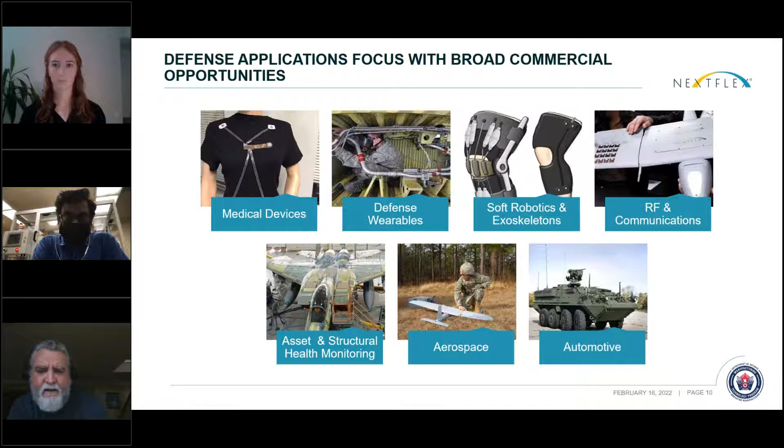Ed? Yes. I'm sorry to interrupt you. This is Scott. GoToWebinar is telling me that the attendees are still on hold. Oh. Is Laura on the meeting? Yes, she is. I sure am. Let's see.

It seems to be okay on my side, and we're being recorded. So let's see. Bruce is raising his hand. Oh, okay. All right, we're getting some comments. So I apologize. It must be my system that's wrong, but I didn't want our attendees to just be waiting for us. Sorry. Okay. Thank you, Scott. That's nice to know. Yeah, I think we're good.

Thank you. So early within NextFlex history, we wanted to come up with a project where we could not only demonstrate the attributes of flexible hybrid electronics, but also show the capability and maybe open up the vision of other people as to what they could do with this sort of technology. And so we took a well-known microcontroller, the Arduino Mini, and we did a direct conversion to a flexible hybrid device.

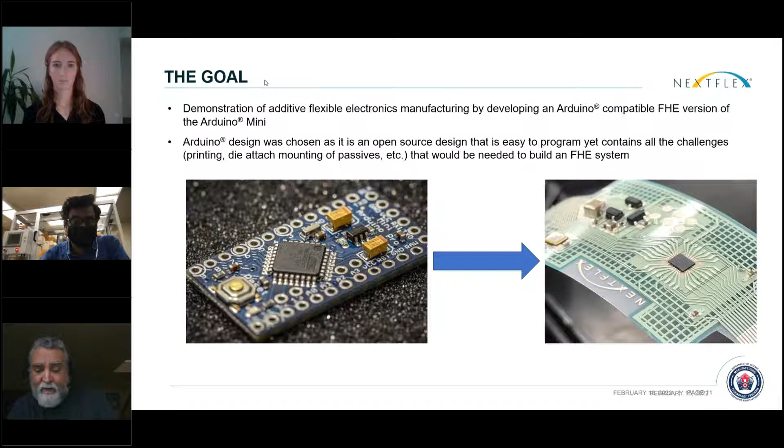Next slide. Oh, yeah, thanks. And so this led to an evolution of this platform, upon which we built up different projects, some for DoD and some for commercial applications. And basically, we took the basic microcontroller platform, bumped up the capability quite a bit with a different microcontroller. We demonstrated low power Bluetooth connectivity.

We printed antennas and basically expanded the applications per purpose, adding sensors in some cases and physiological sensors in other cases, and in other cases adding structural health sensors. Again, taking this basic concept of a flexible microcontroller and expanding the applications. Next slide, please.

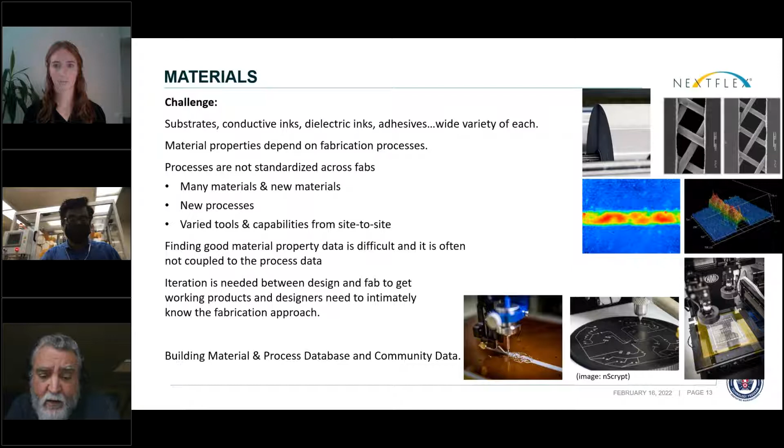We also do more than just build devices and prove out concepts. We also evaluate materials, processes, and equipment with the end goal of characterizing each and finding the optimal application where that particular process or that particular piece of equipment is most relevant. Next slide, please.

Within our technology hub, we have possibly the largest variety of state-of-the-art deposition systems or printing systems, such as screen printing, which is the workhorse of our technology hub, and gravure offset. And by the way, many of these are printing techniques that have been common to the printing world, the newsprint world, for quite some time. But the application of these into printed electronics is somewhat new.

We also have digital platforms such as extrusion and aerosol print capability. And a little bit more later on today, we'll be talking a little bit about plasma jet deposition with Space Foundry. Next slide, please.

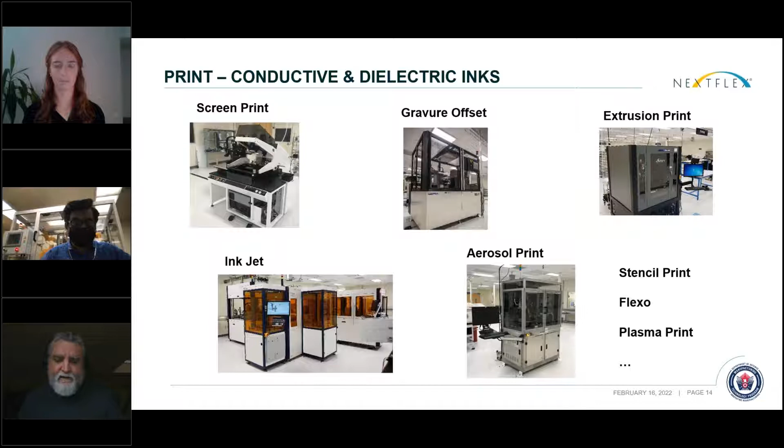Also within our facility, we have a manufacturing integration area, and the workhorse in that particular facility is our BESI, where we do ultra thin die integration. That is to say, we'll take an unpackaged chip and we'll thin that chip down to the point where it also is flexible, and place that directly on the substrate, and the piece of equipment that we use to do that is basically the BESI.

In the future, we'll be bringing up another platform which will also be capable of putting down the die and processing with an alternative methodology. And that's with our universal and adapting of the universal pick and place tool.

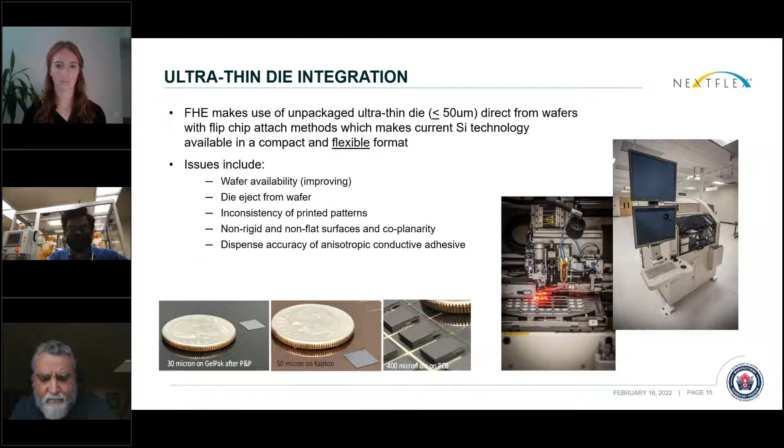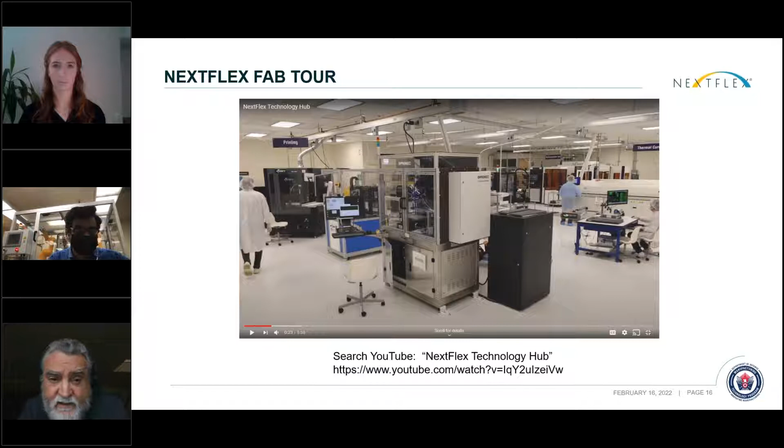Next slide. So if you'd like to have a virtual tour of our technology hub, you can go to YouTube and try searching NextFlex Technology Hub, and you should have a couple hits where you'll get to do a relatively current walkthrough of our technology hub and see some of the many pieces of equipment that we have there. Next slide, please.

So now I'd like to take a little bit of time to talk about the Defense Manufacturing Community Support Program grant through the California Governor's Office. Next slide, please. The Defense Manufacturing Communities Support Program is designed to support long-term community investments that strengthen national security innovation and expand the capabilities of the defense industrial ecosystem.

And under this program, the Department of Defense awarded 6 grants totaling $25 million under the Defense Manufacturing Community Support Program by the Office of Local Defense Community Cooperation. These awards follow a competitive selection process culminating under the Undersecretary of Defense for Acquisition and Sustainment.

And under this process, the state of California, and specifically the organization within the state of California, Cadence, which stands for the California Advanced Defense Ecosystems and National Consortium Effort, was first designated as a defense manufacturing community, and then later awarded a grant of $4.9 million that was given to the state of California to provide this support. Next slide, please.

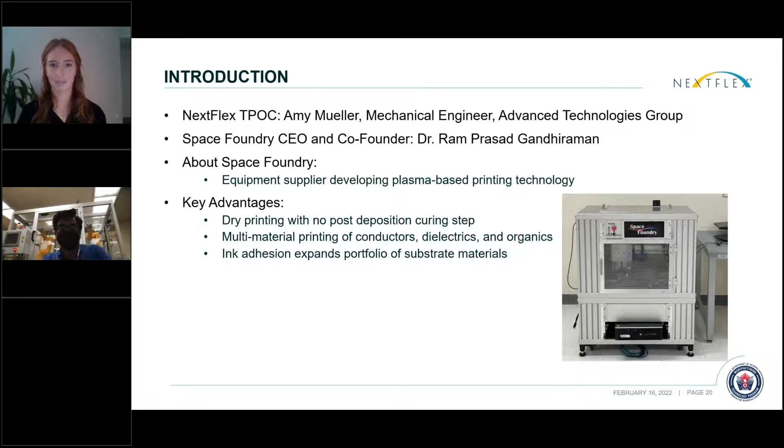Apologies for the fire alarms. Let me give it 1 second.

All right. So by integrating Space Foundry's OEM module on our 6-axis robotic arm, we are able to together confirm that the print process does not rely on gravity. This feature, plus the ability to cure as you print, makes Space Foundry's technology a huge enabler of large non-planar print applications. Next slide, please.

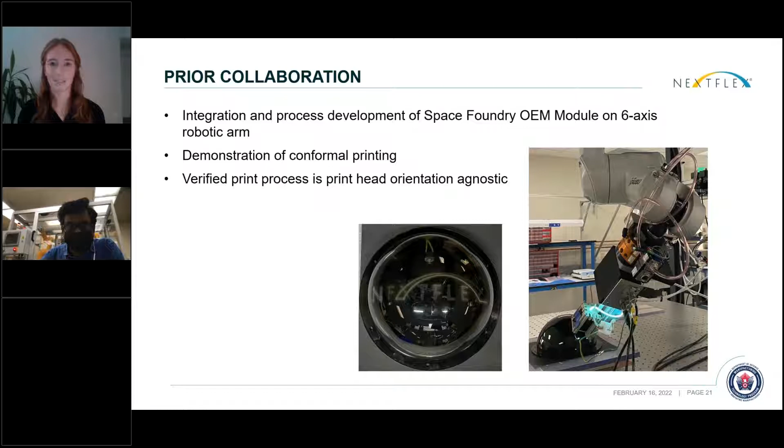As part of the Cadence program, we at NextFlex were able to support Space Foundry through these 2 main tasks. So NextFlex supported the continued technology development by providing working space and resources at our technology hub in San Jose. This regular access to our facility included working alongside NextFlex staff and the ability to use test and characterization equipment found in our fab and test lab.

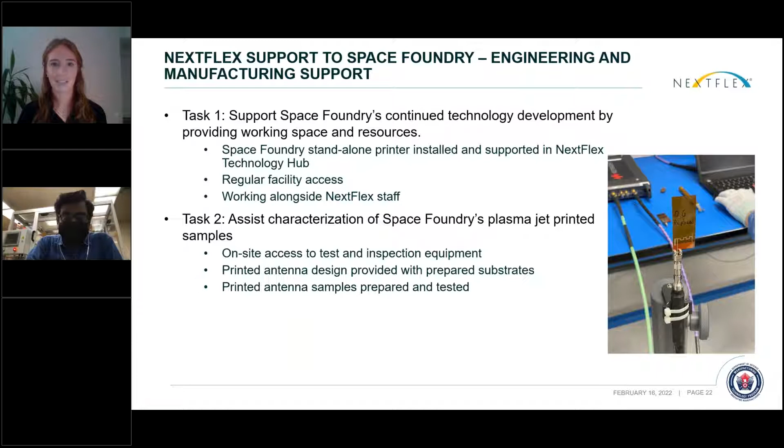We are also able to support the characterization of plasma jet printed samples by providing the design and characterization of printed antenna samples. And with that, I'm going to hand this over to Ram to talk more about Space Foundry and how the Cadence program has supported their efforts.

Yeah, thanks, Amy and Ed, for the introduction and also for the opportunity to talk to the wider audience. So Space Foundry is a hardware startup here in Silicon Valley. We are a spin-off of NASA Ames Research Center. I used to work on site as a contractor at Ames, and then spun off Space Foundry, licensed my own patents, and myself and my co-founder Dennis from Stanford, we both started this

company. So we are currently selling equipment and are developing some very interesting solutions for printing a wide range of materials. We have a few patents that are granted and several filed, and we are primarily funded by NASA SBIR. We have an ongoing active phase 3 SBIR. NASA has invested over $1.6 million so far in Space Foundry. And we work very closely with the groups from Marshall Space Flight Center and also Ames Research Center here in California. And we are primarily revenue generating through equipment sales.

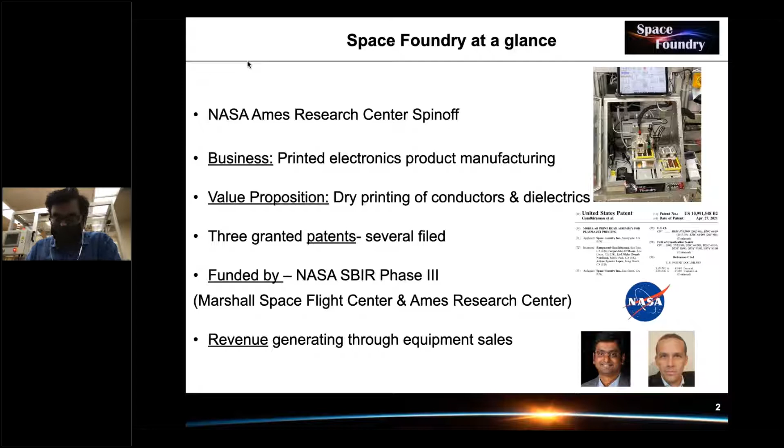So we are actually focusing on the emerging printed electronics market. So we are not trying to displace something that is already well established and working. What we are trying to do with our technology is to enable new applications and enable printing on certain platforms which are very difficult for the traditional way of printing.

For example, we are working with an aerospace and defense company jointly through NextFlex, where they are working on printing on large aerospace structures. We print certain metal patterns onto these structures, and PlasmaJet has the ability to print on such large 3-dimensional objects fairly easily.

And we are also in discussion with certain companies here in Silicon Valley to enable conformal electronics on their AR/VR headsets, and also to enable some semiconductor packaging applications. And of course, in-space manufacturing is our core vision. So I'll go through some of these applications.

So printed electronics is an emerging industry, and there are certain issues associated with this industry. Some of them include ink, because there are really good printers out there, but they rely heavily on the ink supply chain. The inks need to be cured, and the metals generally oxidize in air, so the electronic properties deteriorate over time. So it gets very difficult processing the ink. And then multiple equipment sets are needed when printing certain materials.

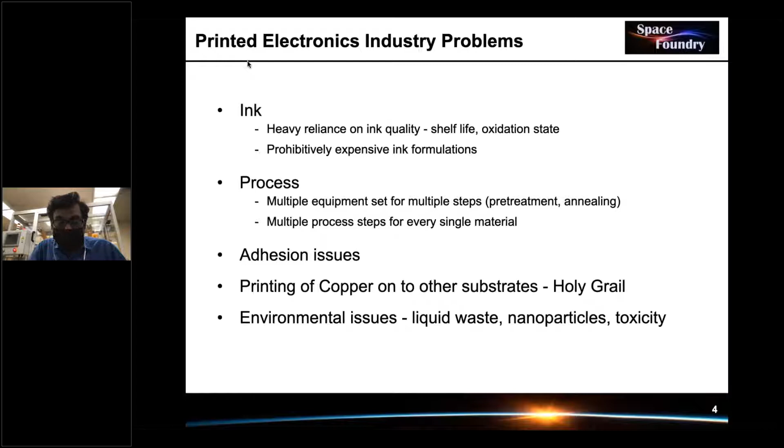And since we are printing on platforms that are generally not amenable to printing, like the aerospace structure I mentioned, adhesion is a major issue. And printing of copper is one of the holy grails. So we're focusing on solving some of these issues. And not to mention, there is no liquid waste associated with this kind of materials processing, no nanoparticles, no toxic byproducts. So it's a fairly environmentally clean process.

So what we're working on is called plasma jet printing. Plasma is the bread and butter of the semiconductor industry, used for making chips, but they use very bulky equipment, mostly vacuum-based processing. What we have developed is like a pen, where the pen can write conducting lines. You can basically write a circuit using this plasma pen.

The advantages include that it's dry printing, so you don't have to cure. So you are reducing some of the risks of oxidation, and it reduces the number of processing steps and also the materials cost. And as I mentioned, we use off-the-shelf inks. We are more or less agnostic to the type of ink, so we can handle a wide range of inks. At the same time, we have an in-house water-based ink that reduces the supply chain issues significantly. These inks have a longer shelf life, and since there are no nanoparticles, this becomes ideal for in-space manufacturing as well.

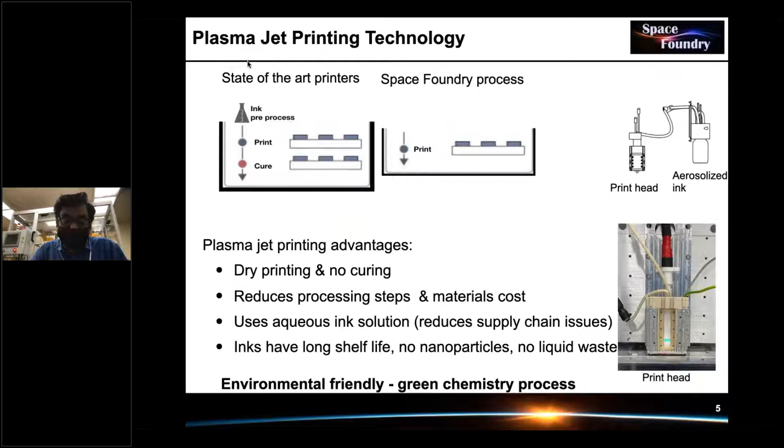So basically, plasma here is different from blood plasma. This is a gaseous plasma. It's like a lightning discharge, happening in a very controlled environment, a low temperature process within the print head. You introduce a gas, apply a high voltage, the gas becomes conducting, and because of the electromagnetic field, all the particles in the printhead get accelerated. So they bombard the substrate, and as a result, the adhesion is better. And you can tune the electronic structure of these materials. These are fairly known in the semiconductor industry, and we are adopting that process to this emerging printed electronics market.

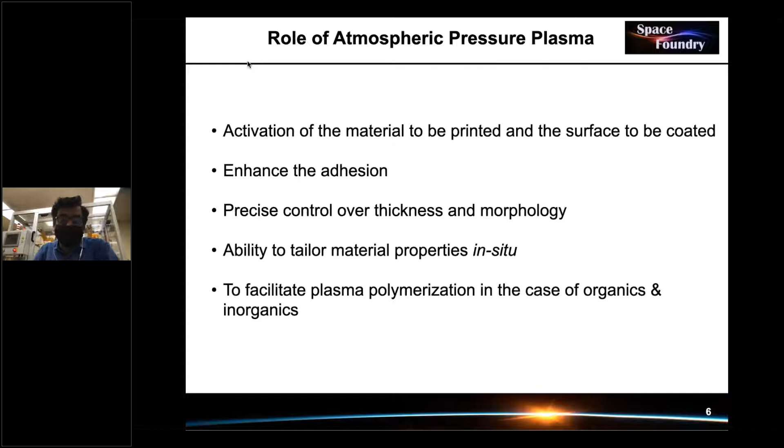So we have been selling equipment so far to universities and federal labs, and we are currently in discussion with some companies to see if we can do a printing service, where we can scale the business in certain segments apart from selling equipment.

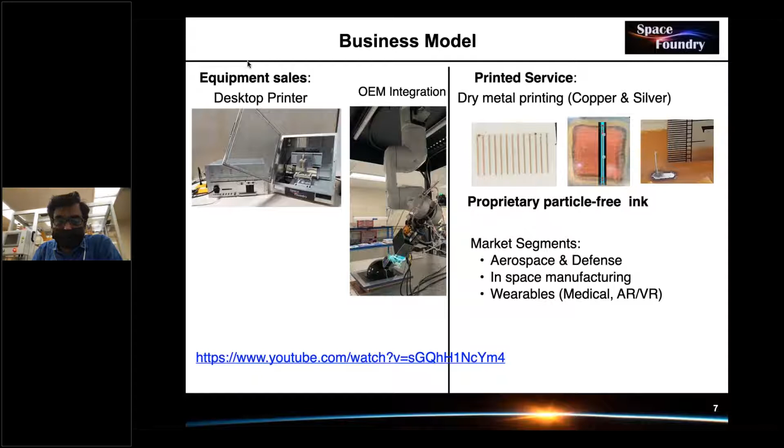Some of the verticals we are working on currently: the current focus in aerospace and defense is on conformal antenna printing, what you call frequency selective surfaces as well. The other application, as I mentioned, is AR/VR conformal antennas, and then early stage discussions with the semiconductor and auto industries. What we have demonstrated is that plasma jet printing is going to be the only viable solution to enable embedded electronics on really large three-dimensional structures, which are very difficult to process using conventional materials processing technologies.

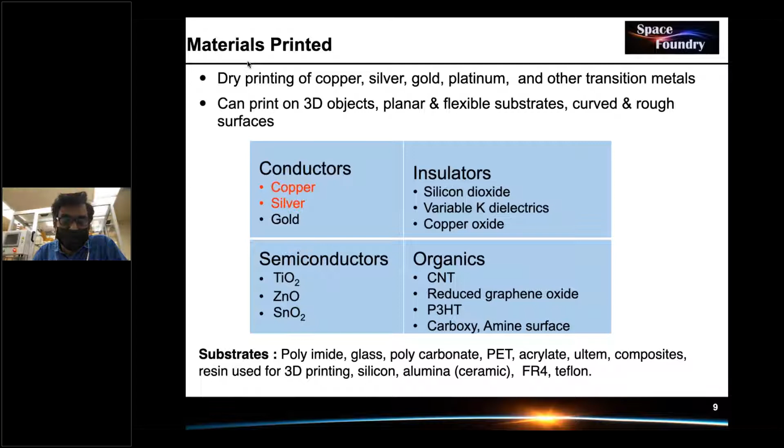So we have demonstrated a wide range of printing since my days at NASA Ames, over the past 10 years exactly now. But as a company, we are focusing on copper and silver. This is a true enabler, a platform that can print a wide range of materials. But since we are a small company, we need to focus on a particular thing. So we decided to focus on conductors, primarily copper and silver.

Some of the examples of copper and silver prints that we have been printing using both proprietary ink as well as off-the-shelf inks. We have been printing antennas, and NextFlex has been helping us in characterizing this.

I will go through that. Wi-Fi antenna and X-band antenna on polyimide, and we have also been printing some vertical patterns. These are very early stage data that we have. So we are in discussion with the semiconductor industry to see if we can use this for filling the vias for their IC manufacturing, for their chip manufacturing process.

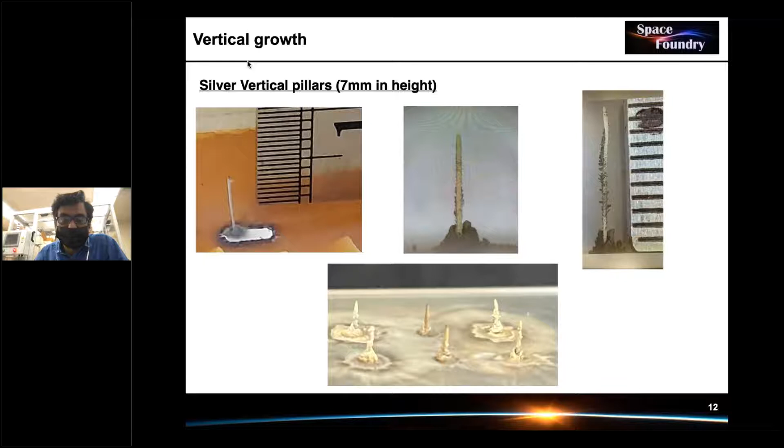So moving on to space, basically the technology was originally developed, as I said, at NASA Ames, meant for space applications, and we have been selling equipment as revenue generating to somehow mature the product as we are working through NASA grants. So we have gotten to a stage where the product is mature, and we recently demonstrated printing in zero gravity.

I'll show that in the next slide. Space Foundry's vision is to become an indispensable supply chain for any metallization need in space and on the Moon. We have certain applications that we can really enable, like phased array antenna metallization and interconnects for solar panel manufacturing and alloys as well. We have the capability to print two different materials, mix them, create alloys and also metamaterials.

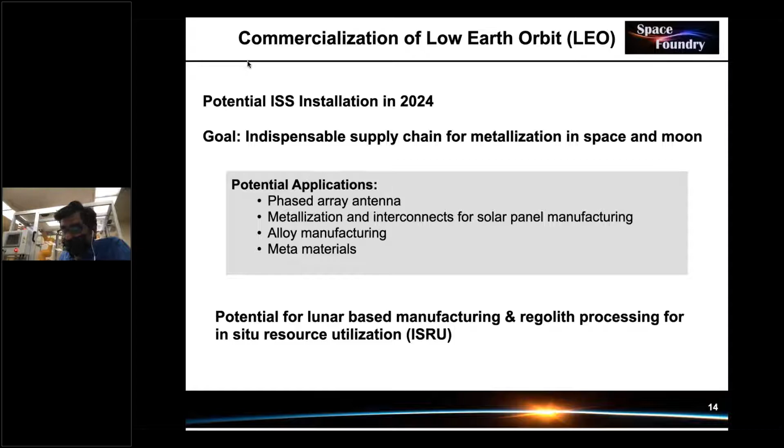So we will be working with some of our partners here, also with NextFlex potentially on lunar-based manufacturing as well. So our recent demo is actually very interesting. I'm not sure if most of you are familiar with what is called microgravity printing, zero gravity flight.

Basically, this is to demonstrate that the technology works in zero gravity. There's a flight operated by a company called Zero Gravity Corporation. They basically run summer and winter campaigns to run experiments, primarily for NASA funded projects, or those companies that are interested in space applications. If they want to demonstrate that their technology works in microgravity, one of the easiest ways is to take the product on this flight and demonstrate that it works during the microgravity conditions.

So the way it works is the flight takes a parabolic path. It climbs up and then changes direction. While climbing up and then climbing down, the G value goes all the way up to 1.8 G. And then when it changes direction, there is a free fall for about 20 to 25 seconds. That's when you get to float. So we have to print in that window.

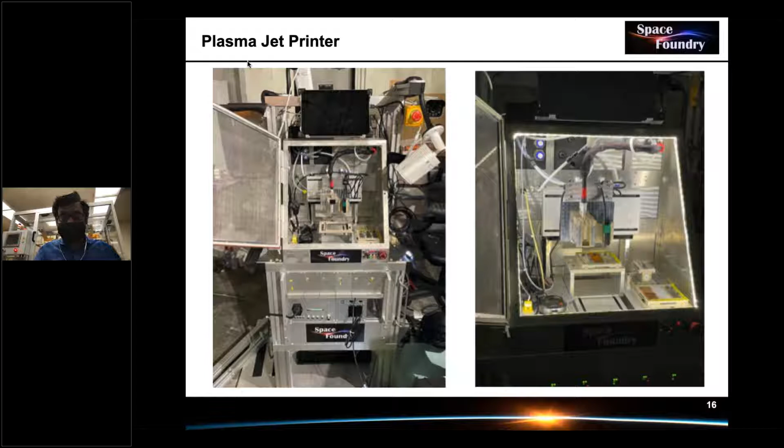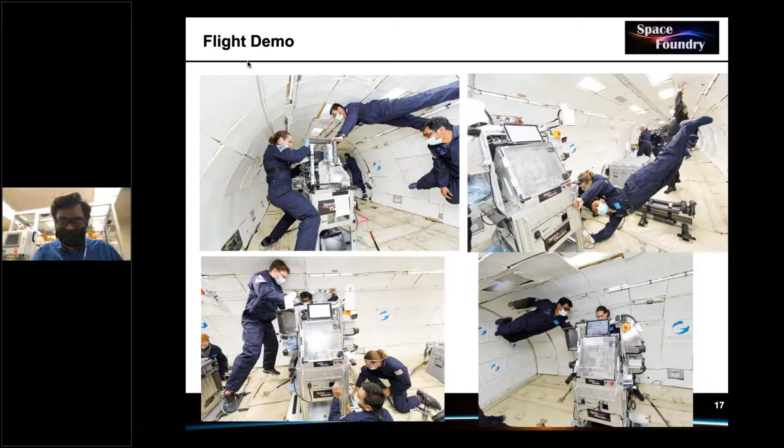So we have done that. We took this printer into the flight. We programmed it and then demonstrated printing in this flight. So here are some of the pictures showing us working in this microgravity environment.

It was actually, we had a very challenging time. We had 4 flights that were reserved. We had intense plans for every day. And on the very first day we go up, and then we lost communication. Basically, the printer was not working. It was extremely stressful.

Because the flight goes from 1G to 2G and 0G, some of the solderings get loose, and the electronics, the wiring that is sagging, that's going to pull, and it will lose the connections. So we kind of understood that and then tried to fix it. And then we also realized that 25 seconds is way too low, especially if you are changing from 1G to 2G, you get pulled, and then suddenly you get released, and then you float, and then again you get pulled to the ground. So it gets, the brain doesn't work, especially for the first 2 times you are there.

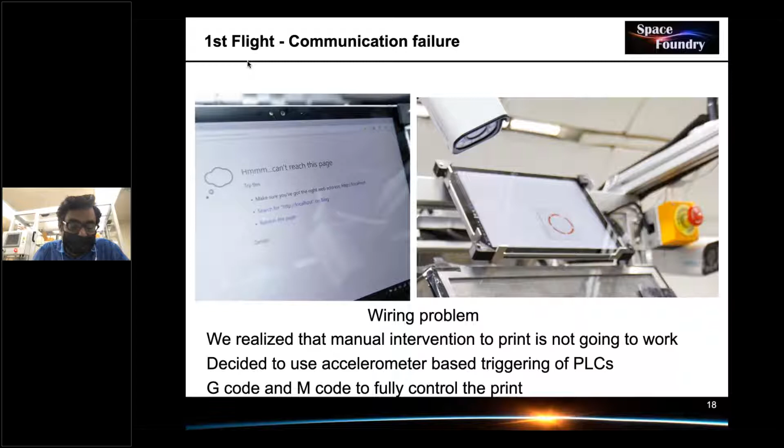So we decided to go completely automated. This is a system that has a lot of wiring that absolutely needed fixing.

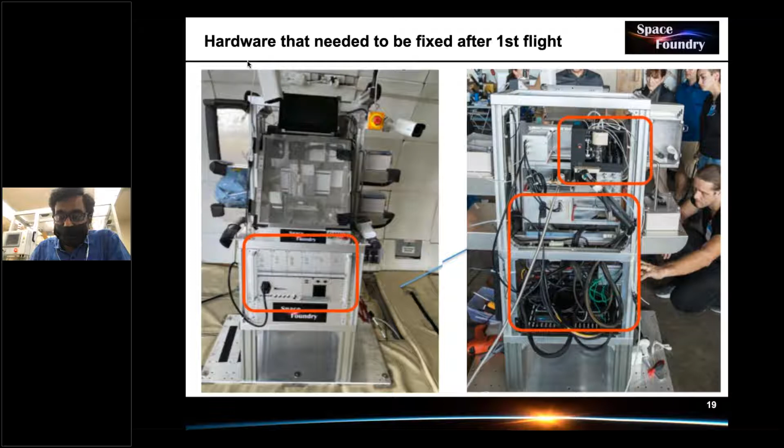And then we addressed that, Marshall and Ames folks helped us, and then we actually visited Kennedy Space Center. There the payload people also worked with us, and we solved that issue, and then we were good to go. We tested on the second flight, and then there was another problem we came across because of some pressure related issues. Even the second flight didn't work, and then on the third day we were getting some partial success.

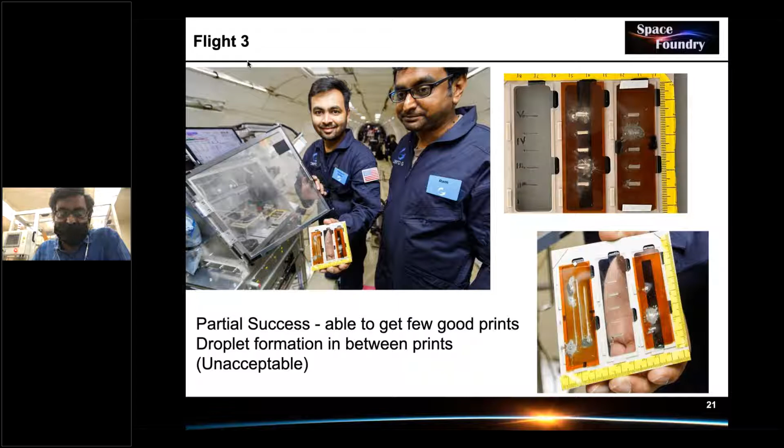So we decided to focus on that. We had very few hours to fix it before we left the aircraft, and then came back the next morning. We fixed it, and on the final day we were able to get really good prints - absolutely good, very successful. Some of the properties are actually way better than what we see on the ground. NASA has funded us a continued flight demo, so we'll be doing more studies in June this year to substantiate our claims and demonstrate further.

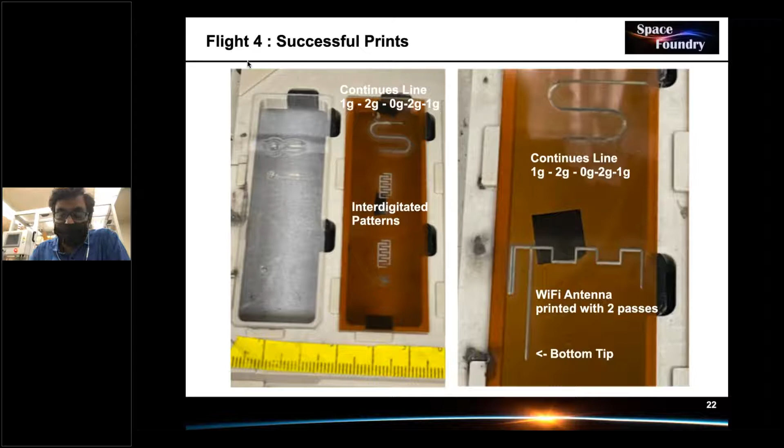These prints are all in 0G, close to 0G. We will also be demonstrating in lunar gravity, because we are submitting a proposal for lunar-based manufacturing.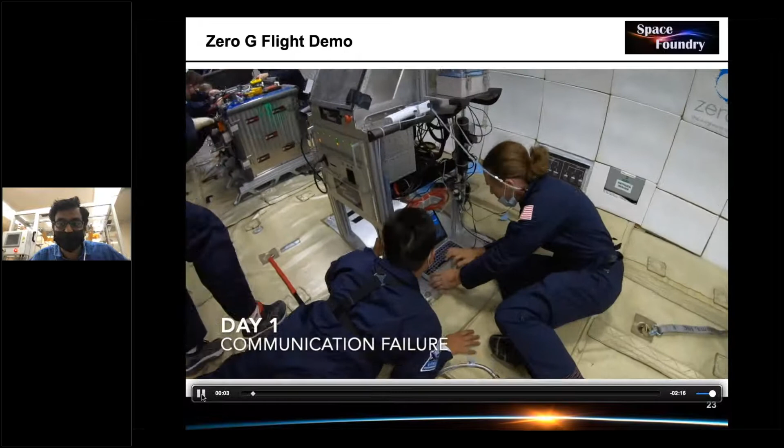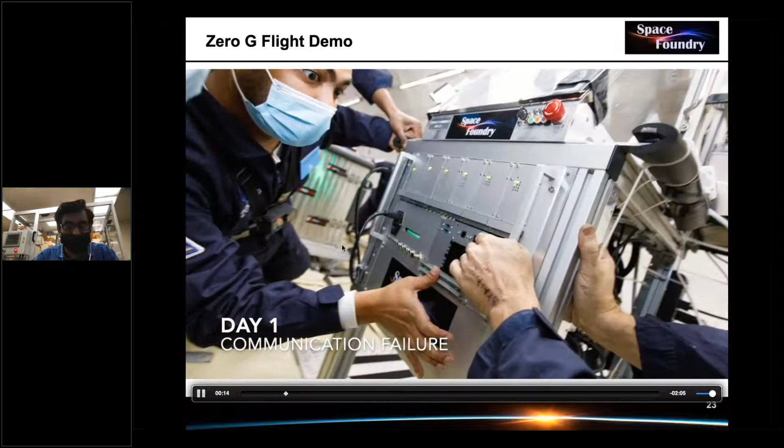So that's day 1. Sorry, I don't know what happened there.

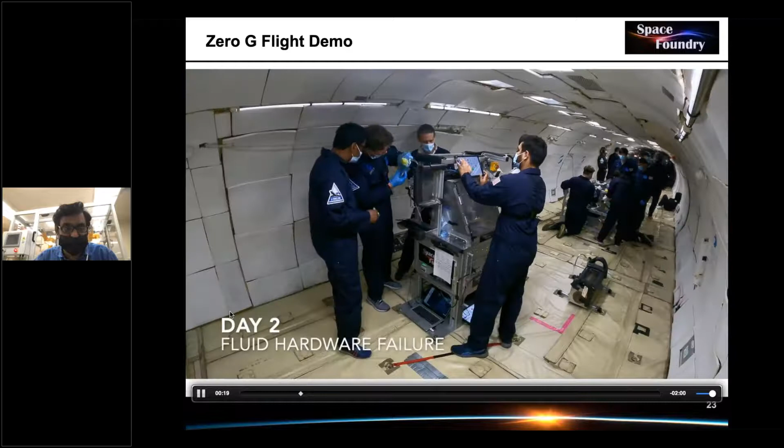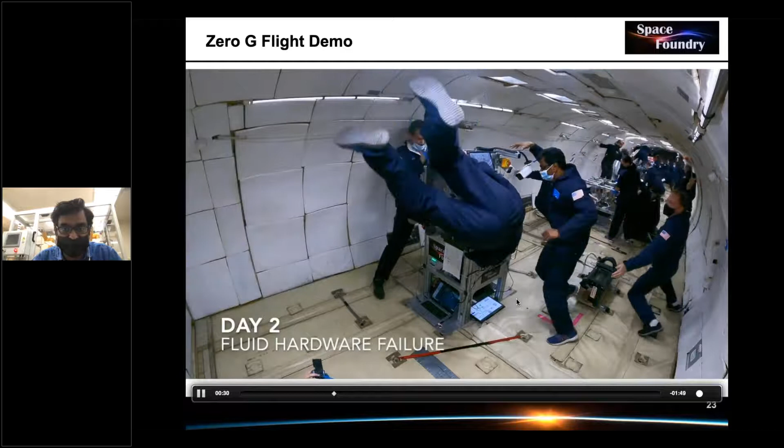On day 2 we had fluid delivery issues, and there were no prints. We were disappointed. Then on day 3 you see that one of our colleagues, Daniel, started puking.

This flight is well known for that, it's also called the vomit flight. Because of this varying gravity, you tend to vomit, especially since it's kind of stressful at times.

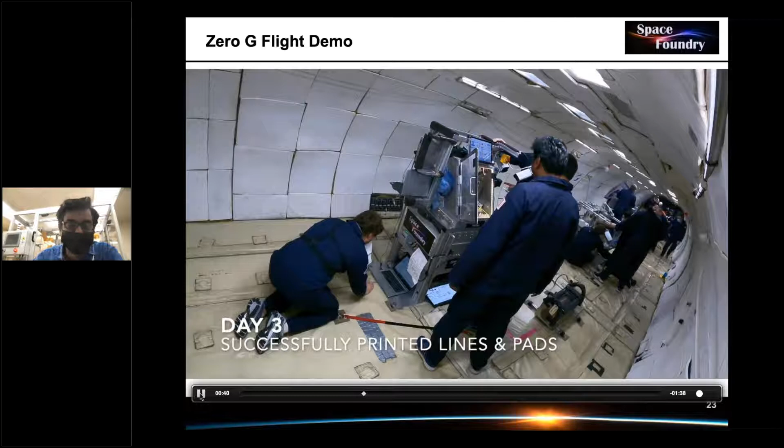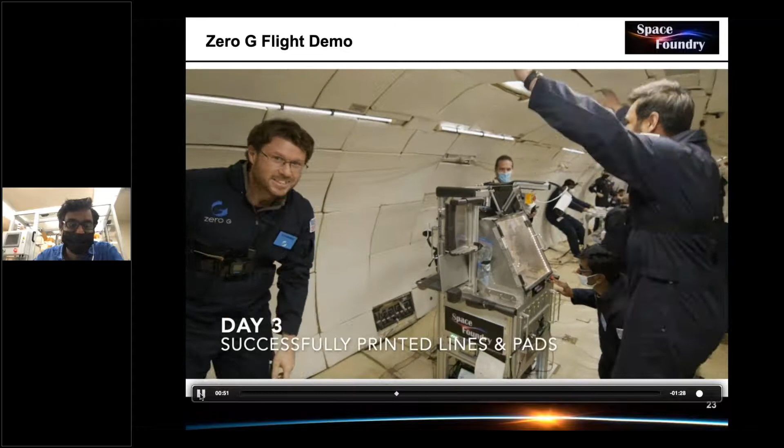But we were still working. Daniel was still completely working, and then it started printing on day 3, and we really started enjoying it, because we were under intense pressure.

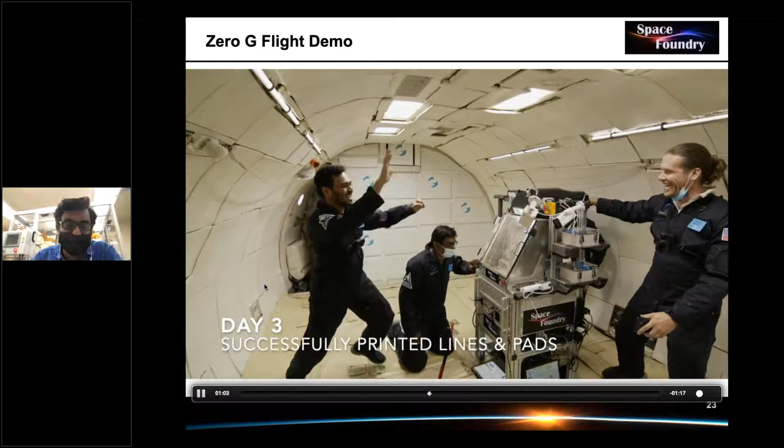Each flight, roughly about $50,000 that NASA had invested per flight. So every flight we burned like 50K, and we were under intense pressure to make it work.

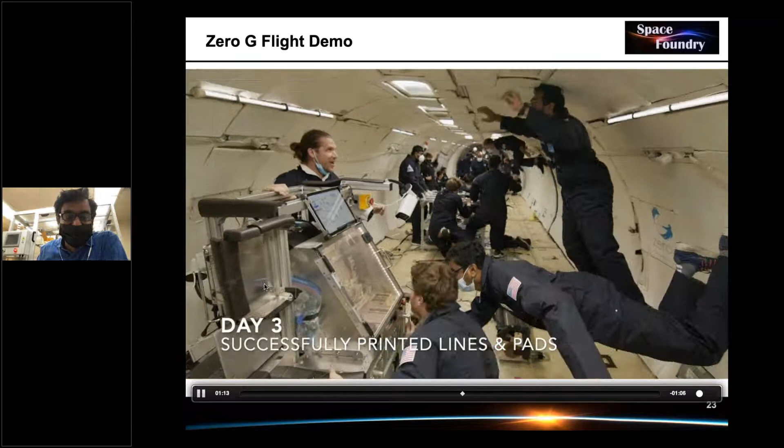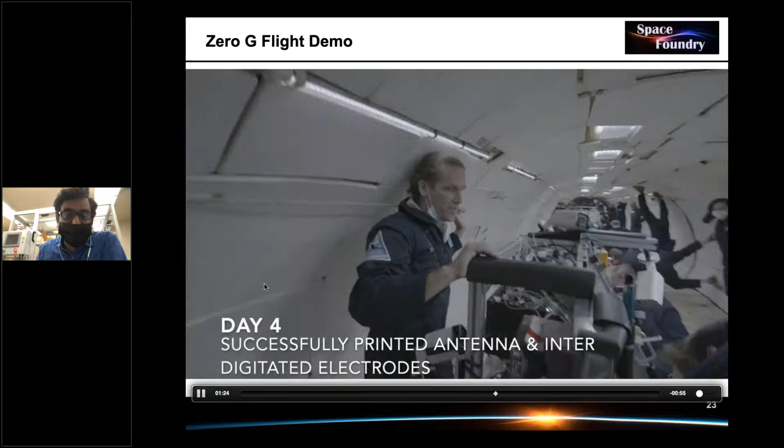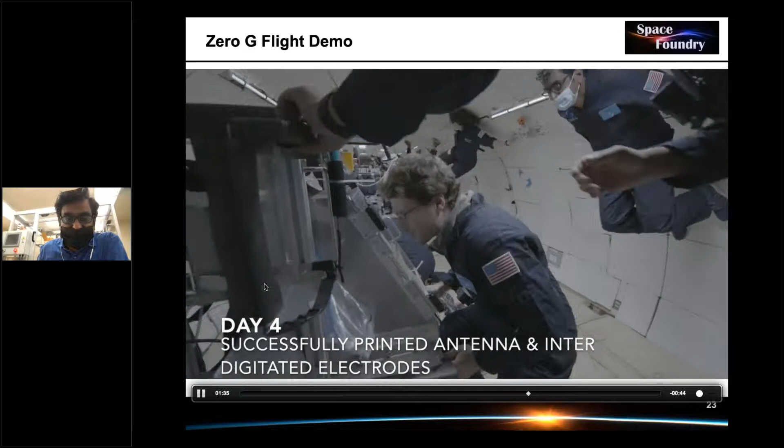Some of these days we were in Florida for 3 weeks. Some days we worked continuously for 36 hours - none of us went to sleep because we had to load the printer into the flight. That's why you see the celebration going on when it's printing.

It's completely automated, so you can print from anywhere on Earth, basically. If you have internet you use that, or if you don't have internet, you just use Wi-Fi and print locally.

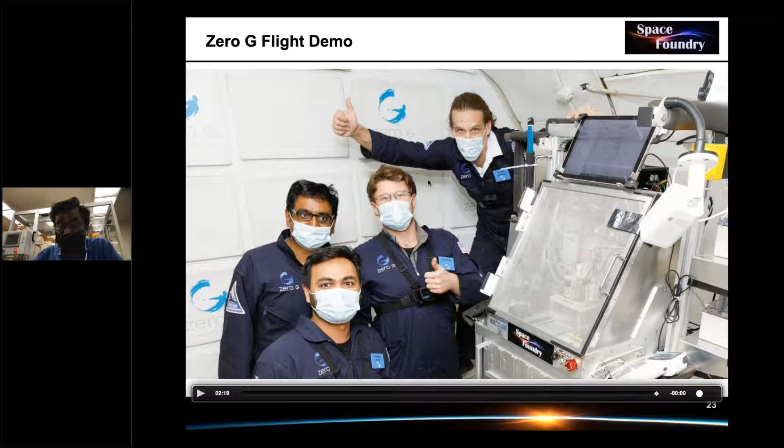These are some of the prints. They are all printed in anywhere between 20 to 40 seconds. We didn't have to do any curing, pre-treatment, or post-treatment, and we got amazing results.

It's very promising. On the right you see what's called a scanning electron microscope, where we look at the microstructure down to the 100 nanometer level. What we see on the right is samples printed on the ground, and on the left are samples printed in 0G conditions.

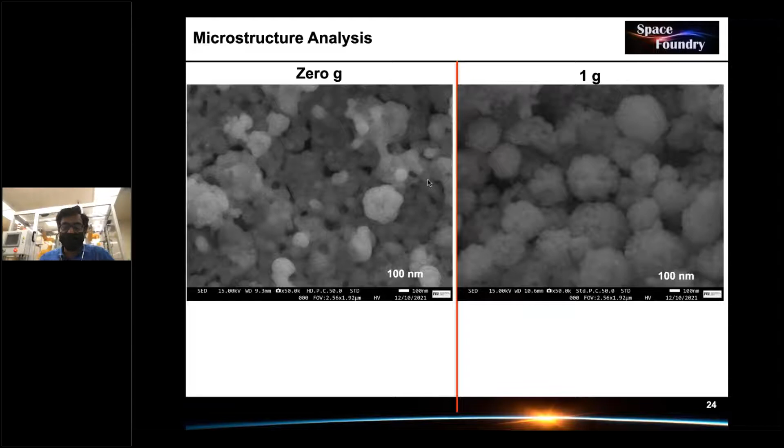You do see that samples printed on the ground have this globular growth, whereas in the microgravity environment - we don't know whether it's due to surface tension or something else - you see a much better pattern and better connection between these particles.

We have never seen such a web-like pattern of particles in samples printed on the ground. Whereas when printed in 0G, as they are partially sintered in the plasma, they form a well-connected web-like network.

Some antenna characterization was done by NextFlex. We are a really small team, and we've been primarily focusing on developing the hardware and the printing process, so NextFlex has been helping us with the antenna designs and characterization.

Some of these silver prints had resistivity just 10 times higher than the bulk material, which is very promising. We have never gotten this result before for samples printed on the ground.

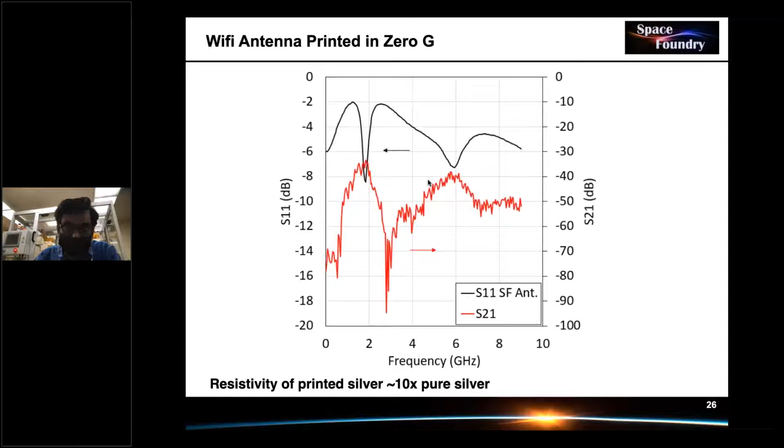The future for this technology is that we are working with NASA to see if we can get this printer installed at the International Space Station within the next 18 to 24 months. We are hoping to have it installed by 2024.

It enables on-demand manufacturing of electronics, and we aim to become an indispensable supply chain for any off-Earth manufacturing. We are also in discussion with other large startups that have raised a ton of money for space manufacturing. We are currently under the radar, so that if and when they need certain materials processing, we will be able to do that.

Excuse me, Ram, we're having a little bit of a connection issue. Could you speak a little slower? That might help some of the audio. Thank you. Sure, yeah.

We are really hoping to have our presence in ISS and also on the lunar surface in the coming years.

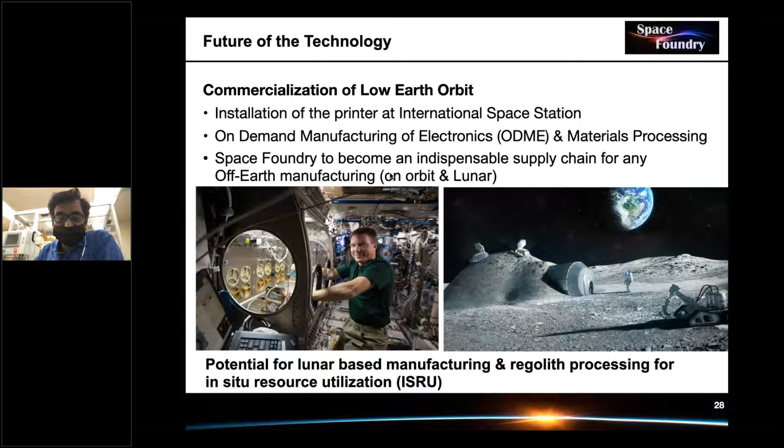So we continued doing the printing process both at our location in San Jose and also at NextFlex. We are just only 10 minutes away from our lab. We also got access to some of the characterization tools, and personnel who have been helping us on a regular basis.

Alex Cook, Amy—she's on the call here—and Mike Avanel as well. We also have Michael Orrill, sorry, I haven't mentioned him. So these are a few staff that we have been engaging at NextFlex.

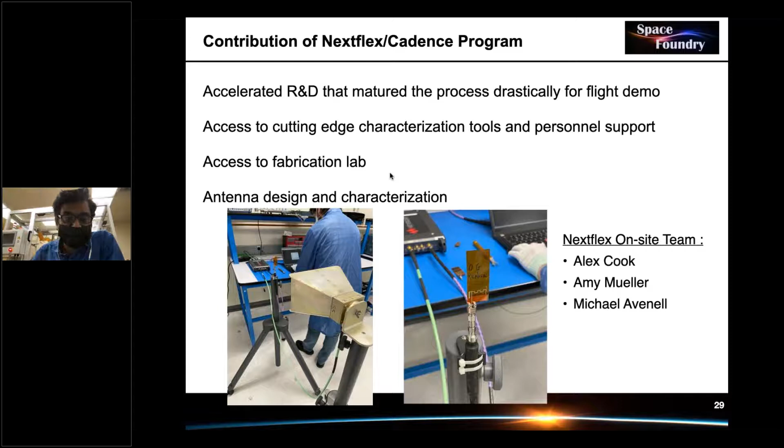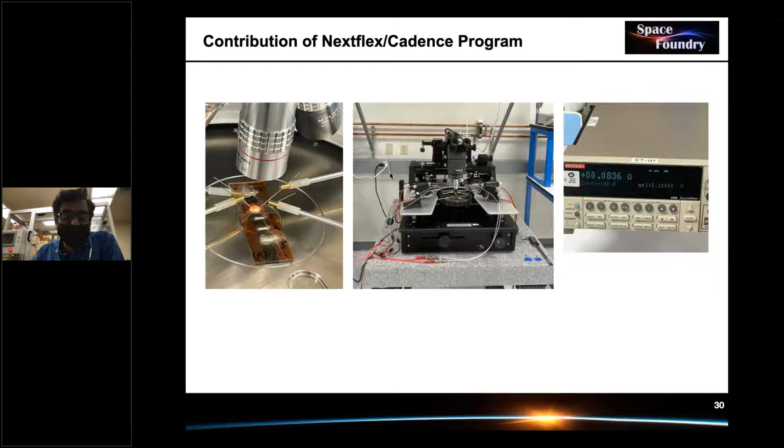This one is what's called a 4-point probe. Again, we don't have these tools, so all of these facilities we're using at NextFlex to measure the conductivity, to see how good the electrical performance of the samples is.

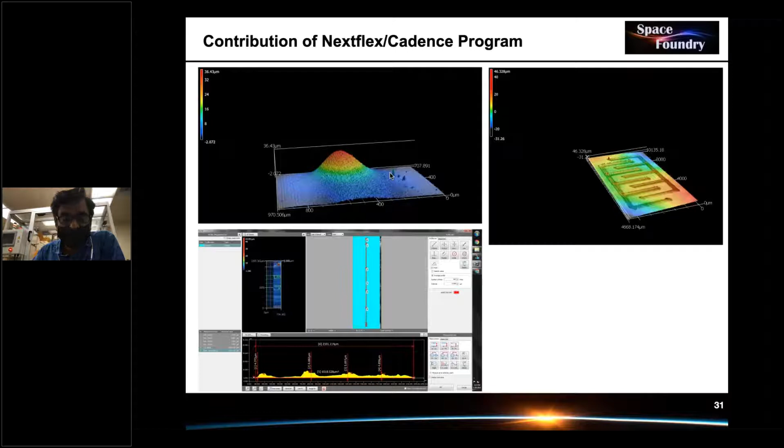This one is what's called a confocal microscopy image, basically a very high resolution microscope. These are all very much needed to evaluate how good or bad the film characteristics are. And this one is our printer there at NextFlex. In addition to the robotic arm, we also have this standalone printer.

The last few slides are our story, just if you have a couple of minutes. Basically, we have been keeping up the Silicon Valley tradition. We started off at the CTO's garage in Menlo Park.

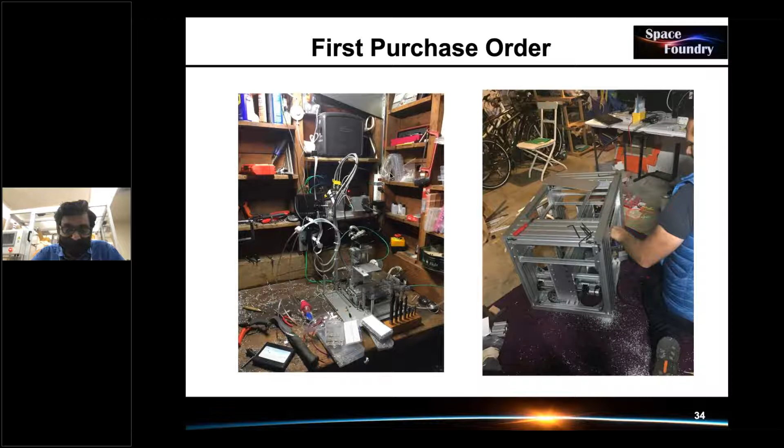When we started the company, we weren't sure which way we should go, whether we should sell the equipment or make some printed useful products. All of a sudden, people from Sandia National Lab reached out to us and wanted to buy the equipment. So we got our first purchase order while we were still at the garage, and then we started making the machine.

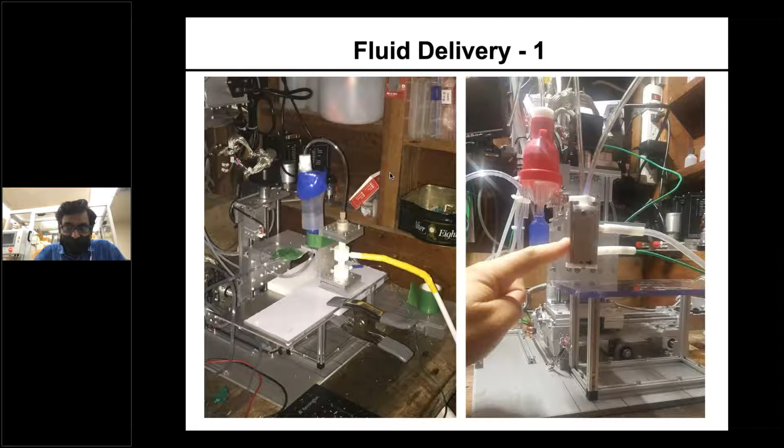Trying different ways, we realized there were really a lot of parts that we needed to validate, and we needed to do intense research and development work. A lot of it was done in the garage in the early days, the first couple of years. We decided to do everything ourselves, including wiring, soldering, and assembling all the gantries.

So we hired some students from Southern California, Cal Poly—absolutely brilliant, highly motivated, they really helped. All of this you see was done in the garage by these three girls, and there's one other guy. Really good, actually.

We kind of started getting more orders, and then customers wanted to come visit us and see how good the product is before issuing us the purchase order. So we had customer visits to the garage, very unusual. They were happy, and right away some of these people were willing to give us upfront money. They knew what it was, so they understood, and they were willing to give money upfront so we could buy parts and pay salaries for some of these employees.

The first system was shipped to Sandia National Lab, and then we have been kind of maturing the product over the past few years.

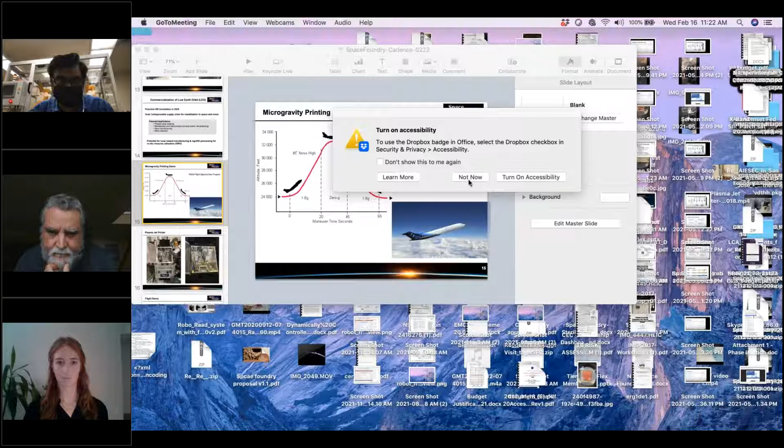No, that was the one. Yeah. Okay, I didn't quite understand that. This is altitude versus maneuver time seconds, and I didn't quite understand what that meant.

So basically what happens is that when you say 0G, you get the condition, but it doesn't really go up all the way to low Earth orbit or anything. It flies at the same altitude as any other domestic or international flight. So that altitude is maximum 40,000 feet.

So the way you get the 0G is when you go through this parabolic route, a sudden ramp, and then change the direction. In that time, you get a certain 0G. So on the x-axis, you see like 20 to 45. It's basically 25 seconds of 0G you get during that parabolic route. So flying at the same altitude, you get 0G? Yes, just by changing the direction.

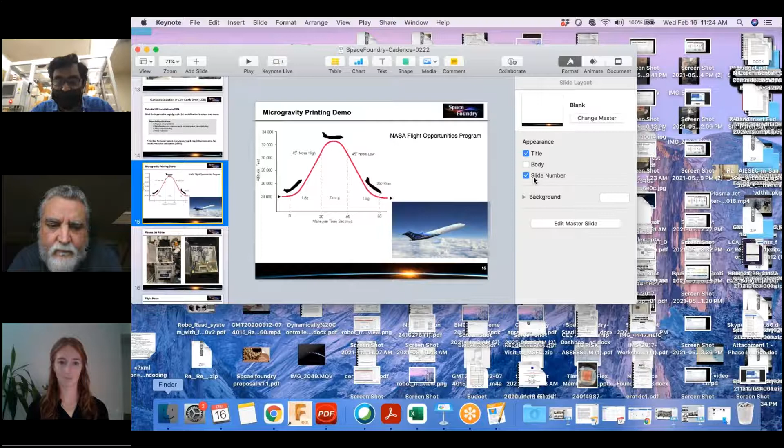Yes, so we get about 30 times. The flight keeps going up and down, up and down, so you get about 30 times 25 seconds. So that's why we programmed it completely so that the printer prints during that 25 seconds. So you can see here, I have the presentations.

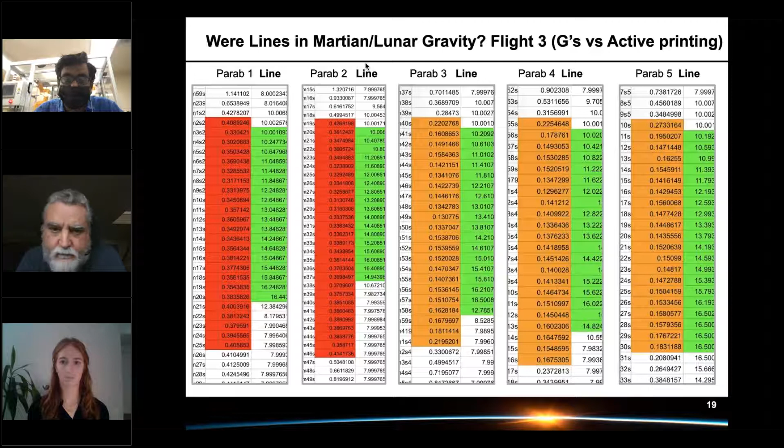So you can see that in the first section on the left, the red denotes Martian gravity, 0.4. The G drops from 1.1 to 0.4, 0.3. And the printing took place only in that green portion, 10 to 16. And then the orange corresponds to lunar G. You see the G drops to 0.1, 0.15. The printing happened only in that green portion.

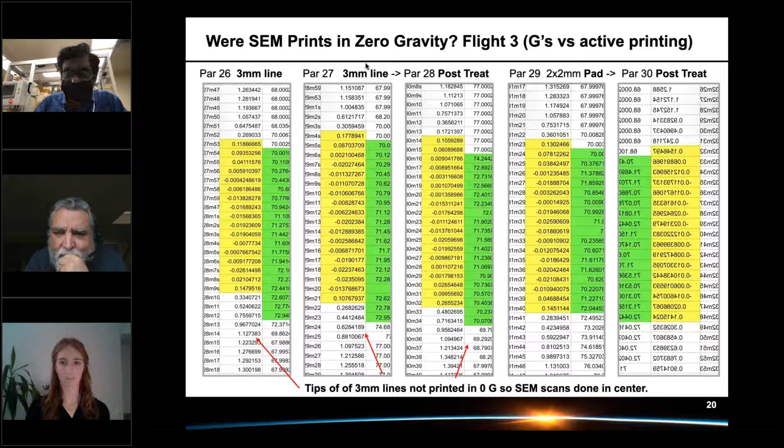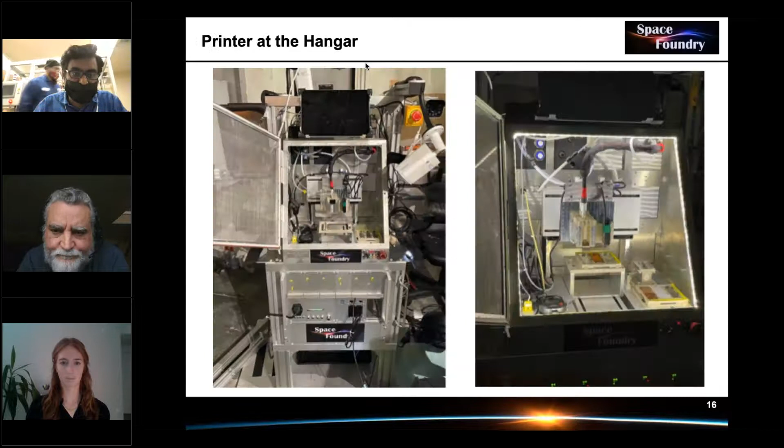And then these are 0G. So basically, depending on how they maneuver, they can get lunar G, Martian G, or close to 0G. So you see it hovers around 0G. All the green indicates when the printing took place. So the way we did this is that we had what we call a parking site. The printhead goes to a park site or a dump site, and it waits.

We programmed it basically and connected it with an accelerometer. So when the accelerometer sees that the gravity changes, it will turn on every part of the printer, and then it will wait until it sees 1.6 G. Once it goes to 1.6 G, there is a sudden drop to closer to 0 G. So we programmed it in such a way that when it sees 1.6 G, the printhead will go to the dump site, activate everything, wait for a few seconds, and then start printing. So that's a very clear pattern.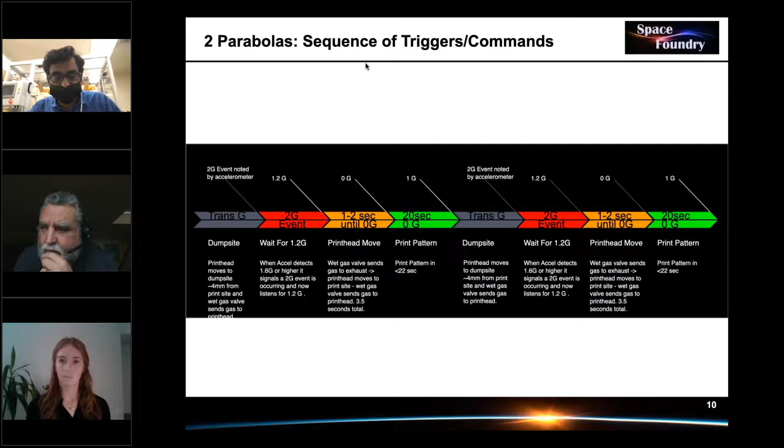I'm sorry, we have several additional questions that I think would be helpful to read out to you, if you don't mind the interruption. Sure. I'll summarize for you. There are several that relate to ink properties. First, where can people obtain more detailed property data on the materials that you can deposit? For example, copper, silver, properties like DC resistivity, surface morphology, high frequency loss, thickness, as well as dielectric materials, and structural properties of the prints, things like edge sharpness, microstructural density, and things like that. That seems to be a pretty common question.

Yes, so basically we can work with both off-the-shelf inks, and we also have this proprietary ink. With off-the-shelf ink, some of our customers are working on some publications, and we are also working on a couple of manuscripts. It's still in pending stage, and there's some work that is needed in terms of resolution, line width, all these things. But what we are currently doing is trying to get the surface roughness, the conductivity, and all these data given the state of the print head, without trying to improve the print head to go to like 50 micron or 20 microns.

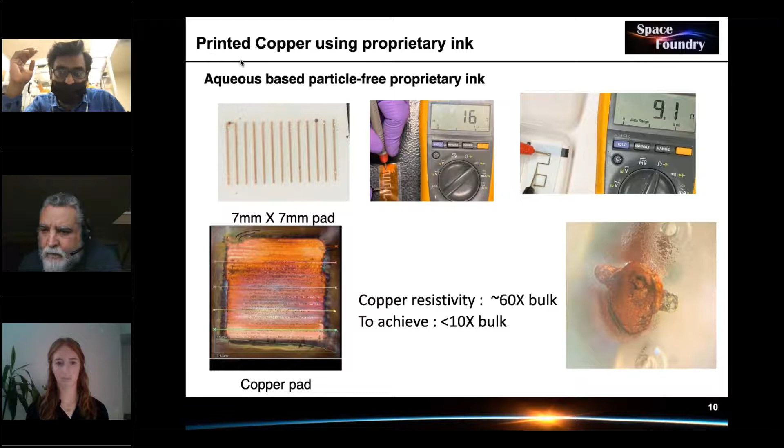And our priority is to get these conductivity numbers. So currently for copper, we are somewhere about 60x the bulk resistivity. And for 0G printed silver, we are about 10x the bulk resistivity. In the next few weeks, we are going to do some consistent printing and get these data out in the public domain.

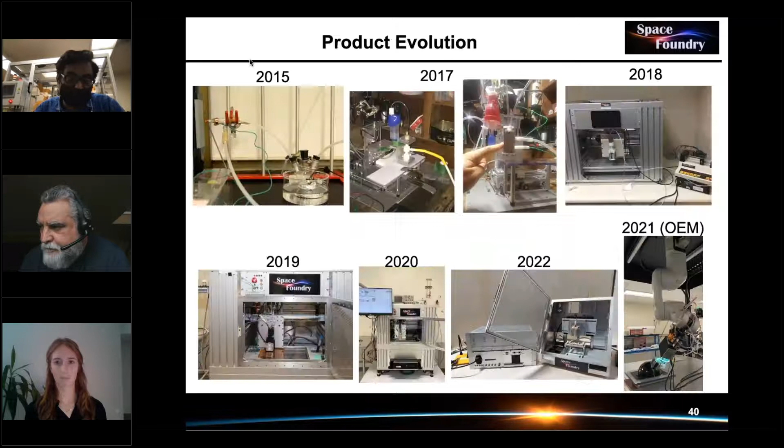The satellite droplets we don't see. I think we have figured out a way to control the droplet formation. At the moment, it's the overspray that we are trying to address.

There's been another question, if you're willing to field one more, just came in. Could you say a little more about the students you engaged from Cal Poly, and with whom did you work? I think that may be referring to faculty. And what kind of arrangements did you have? Oh yeah, actually they were the best, seriously.

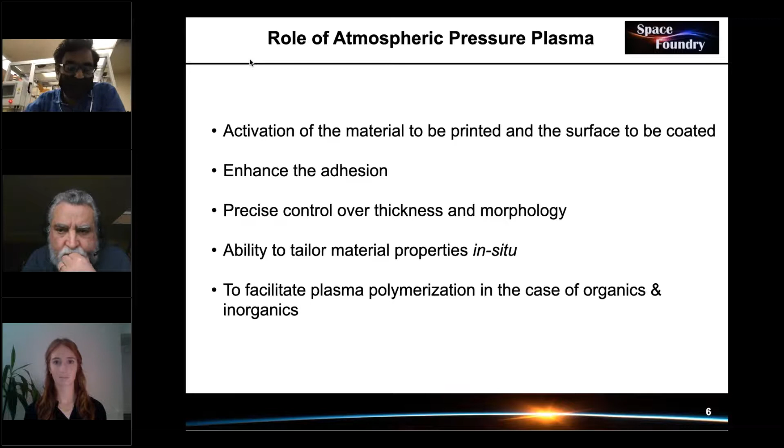And then I told her, we really need some people. She basically reached out to her friends. So we had no contact with any faculty from Cal Poly. So far we have had 4 people from Cal Poly. All 4 of them absolutely good in terms of the competence or the technical capabilities that they had. There's another guy, he just joined Google recently. So I don't have any working relation with any faculty over there.

It gets very difficult since we are not VC funded. We cannot commit to a 2-year, 3-year runway. So it gets a little bit challenging to retain some of the talent. At the end of the day, people do want a more or less stable income, right? All right. And I'll be happy if anybody has any working relation with any Cal Poly faculty that would want to work with us.